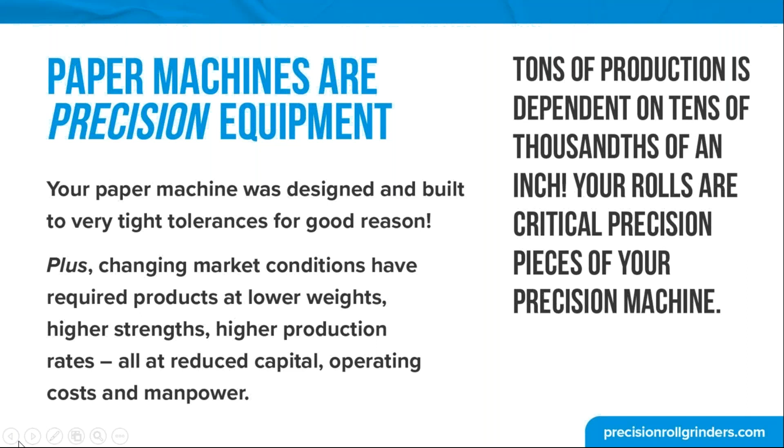So honestly, tons of production on your paper machine depends on tens of thousandths of an inch. So critical roll maintenance, critical roll servicing is a large part of the proper runnability and the proper maintenance of a paper machine.

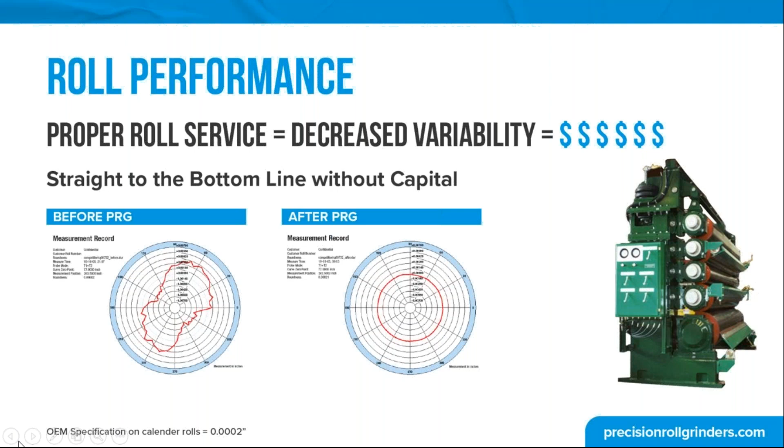Not only does it affect those parameters that we were talking about earlier with respect to your cross direction profile, your machine direction variability, all your quality parameters, but it also affects the length of time that that roll can run while maintaining the things that you need it to maintain on your paper machine. So getting as close to perfectly round as possible is critical. It drives decreased variability, which obviously drives the economics of your paper machine.

Every section of the paper machine has its own unique needs to maintain the kind of quality and the kind of production that you're looking for. In a forming section, it's improved machine direction and cross direction basis weight and moisture variability, primarily high frequency. That's very difficult to detect on the machine, even with the scanning platforms that are out there now, and particularly tough to detect in the paper testing lab. So improved weight and moisture control.

It's fewer issues that are carried down the paper machine into the press section, into the dryer section, through the calender section, onto the reel. If you have size presses or coaters on the machine as well, the more you can do on the forming section to reduce variability, the better off it is downstream.

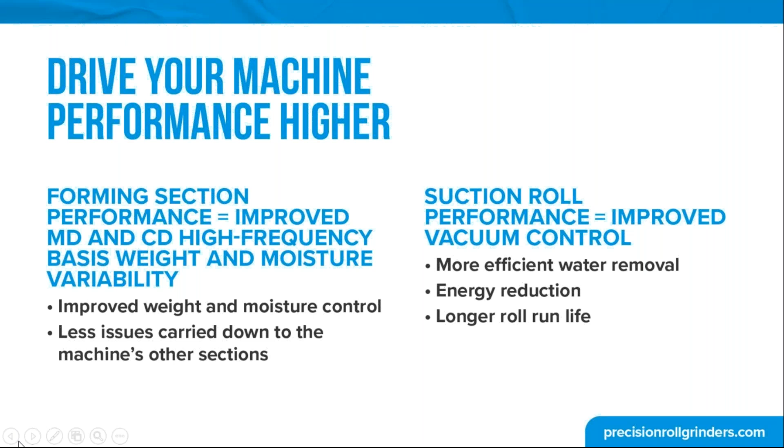Suction roll performance is terribly critical on a paper machine. Efficient water removal, the energy reduction, and those rolls are expensive to take in and out. So you want to run them as long as you possibly can. Couch vacuum, as an example, is critical to ensure that the sheet is strong enough to transfer into the press section properly and give you the kind of results that you need from the press section on.

Speaking of press sections, breaker stacks, size presses, on-machine coaters are all terribly critical with respect to roll shape, to roll roundness. The reduction and elimination of wet streaks is something that, in my experience, every paper machine goes through at one point in time. Energy reduction on those suction rolls, as we mentioned, and of course, longer run life on your rolls.

In addition, in coaters, it's consistent coat weight across the web. In size presses, it's consistent application of starch or whatever product you're putting through your size press. And then, of course, calender roll performance is really critical. We'll talk in a little bit about how the calender stack is the most important piece of the paper machine with respect to reducing variability.

But better reel building leads to better performance downstream, not only through your winder, but also with your customer. Improved strength variation. Quite often we don't think of the calender stack in relation to strength, but it is critical, as we'll show. Fewer sheet breaks at the calender and reel, and again, longer run life of those rolls.

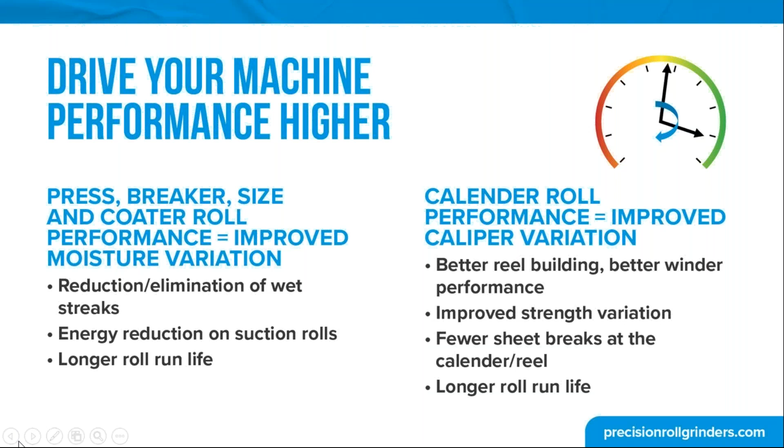Every time you've got to pull a roll out of a paper machine, it's a maintenance effort that you all know, and the more you can minimize that, the more you increase the safety around your outages, the more you free up resources to do other critical things on your paper machine. So we would ask you not to discount the longer run life of rolls as you start those rolls more closely to perfectly round when they go into your paper machine.

So again, the whole idea behind proper roll service and world-class roll service and grinding is to reduce variability and cost from wet end all the way down through your reel, and to drive profitability. Just to recap, in the forming section, it's cross-directional and machine directional basis weight variability.

Coming off the couch roll and into the press section, it's moisture variability, energy savings through proper suction roll maintenance, reduction in wet end breaks. There are many breaks that are hard to identify. How often is that coming from some kind of variability within a suction roll, or some kind of machine direction variability off of the roundness of a roll, or some kind of shape variability off the cross direction profile of a roll?

In a dryer section, obviously steam demand reduction is huge. You know, the 4-to-1 ratio that plays out between what you can get out in a press section versus what you have to do in a dryer section generates large economics on a paper machine.

And then as we get down to the calender, it's obviously caliper variation, which leads to strength variation, gloss and smoothness variation, and then, as we had mentioned earlier, much improved variability for the end user. And the end user starts with the winder in a paper machine, and then goes on, obviously, to your customers and how they're converting it, how they're printing it.

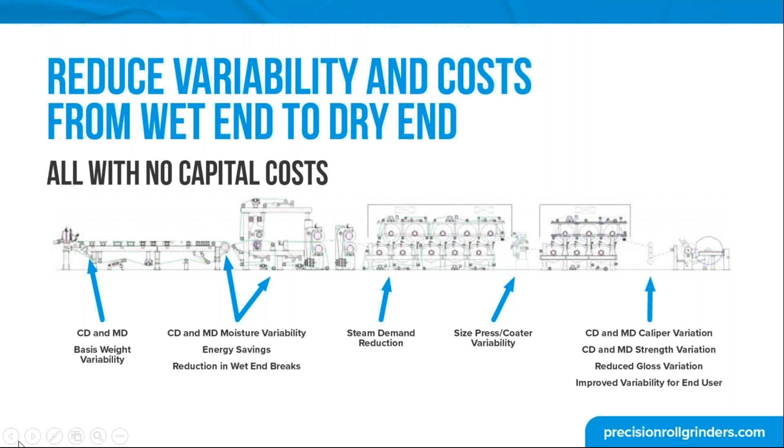So the forming section, it's a really important area that impacts formation. Obviously, cross direction and machine direction profile. It drives sheet strength because you're forming the sheet, obviously, in this spot. So the breast roll, the forming rolls, and gap formers are all very, very critical. And we watch those very closely with our partners in the paper industry to make sure that the shape and the roundness of those breast rolls and forming rolls is adding as much to your process as possible to reduce variability as you begin to form the sheet.

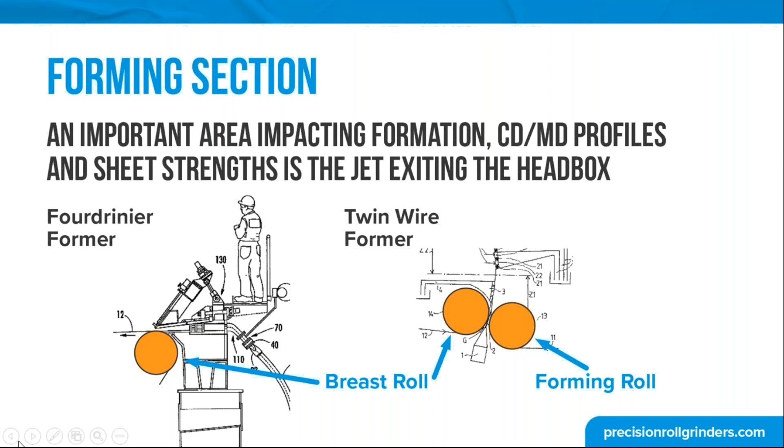Obviously, in the press section, press roll performance, improved moisture variation and solids entering the dryer section. It starts at the couch through suction pickup and transfer rolls, suction rolls in the press, blind drilled rolls in the press, making sure there's proper crowns that are in your roll shape properly, making sure that roundness is there.

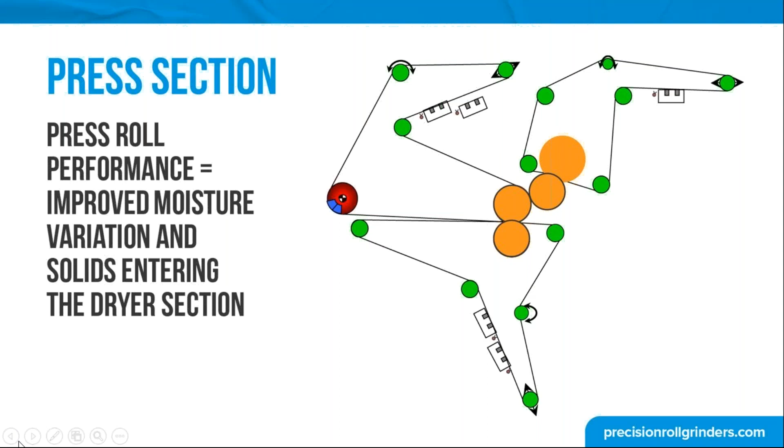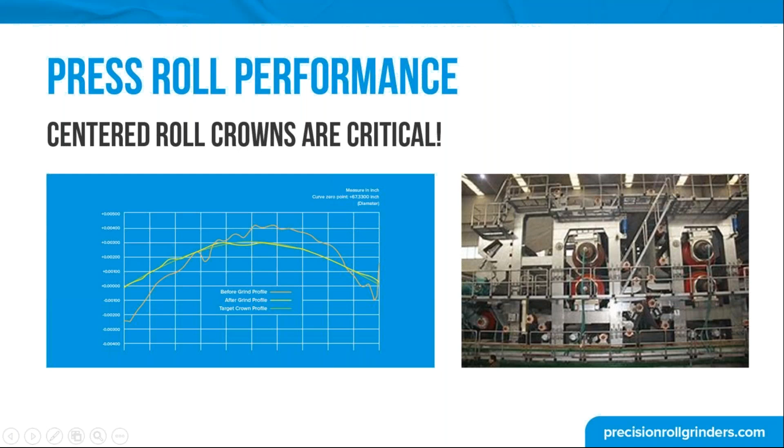And we've actually seen evidence of that in smart covers that are measuring the pressure. We've seen evidence of that a number of times in moisture variability all the way down the remainder of the machine. So even with press rolls, even with soft covered press rolls, it's critical that the grind is right. It's critical that the crown is right, that the roundness is right to get the maximum performance out of your press section.

This is generally how it manifests itself. You know, there's a moisture streak as represented on the left-hand side, and the entire machine is being controlled to that moisture streak.

As a matter of fact, in the paper industry, we're notorious for hanging other equipment on the machine from the press section down, actually starting in the forming section with steam boxes, but from there down with infrared dryers, with compensating controls on calender stacks that many times are trying to cover up what is caused by improper roll grinds down your machine that are causing moisture variation. So with a streak like that, in many cases, the machine is slowed down to control that streak.

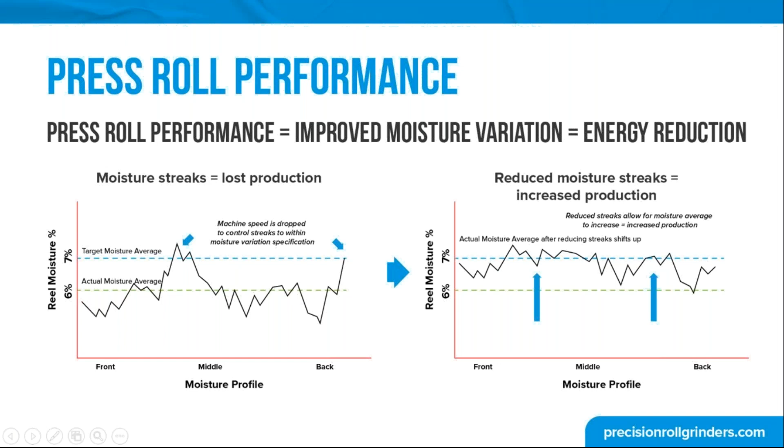With proper roll service, we've seen many examples where we're able to do what's on the right-hand side there and help maintain a much better moisture profile, and therefore, instead of having to run a lower overall moisture target, you're able to shift that target up, and in many cases, speed up the paper machine to shift that moisture target up, and thus driving economics.

And this is a real simple calculator that we've used with customers. It shows, and this is an actual case, where the average reel moisture prior to doing precision roll service and roll grinding work in a press section averaged about 6.2%. Production rate averaged about 50.5 tons per hour. By minimizing the variability of the moisture in the press section, they were able to increase the overall moisture, sell more water, but more importantly, speed the machine up to do that.

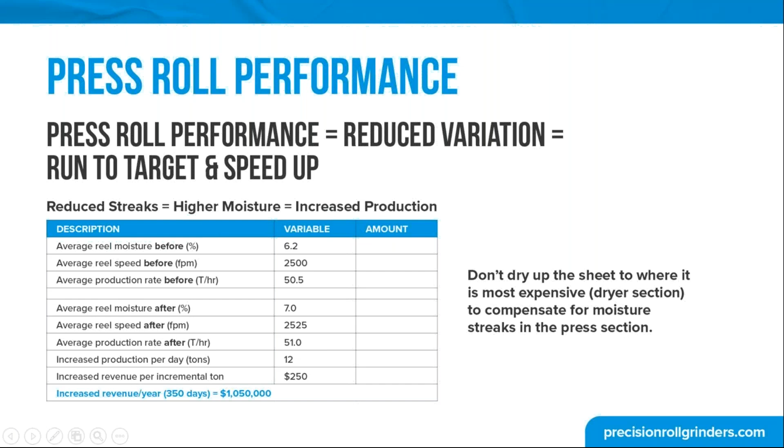So, you know, these are some relatively conservative numbers, and we've got a number of calculators like this for each roll position in a paper machine that we're happy to sit down with you and go through and leave with you so that you can plug your own numbers into them. But this was a savings of about $1 million a year for this customer due to the fact that they didn't have to compensate for a moisture streak.

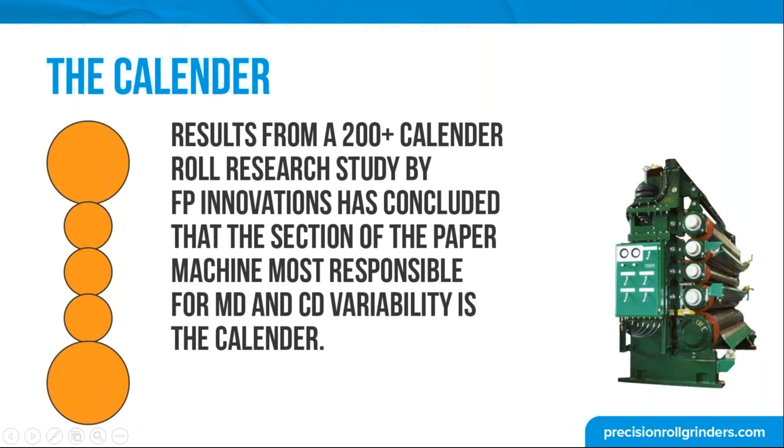And then we get down the machine to the calender, and backing up to that, that also plays out in size presses and coaters on paper machines. At the calender, there was a research study done a number of years ago by FP Innovations up in Canada, and this was an independent study that concluded that the section of the paper machine most responsible for machine direction and cross direction variability is the calender. We think quite often most of it happens prior to the calender, but the calender is that critical.

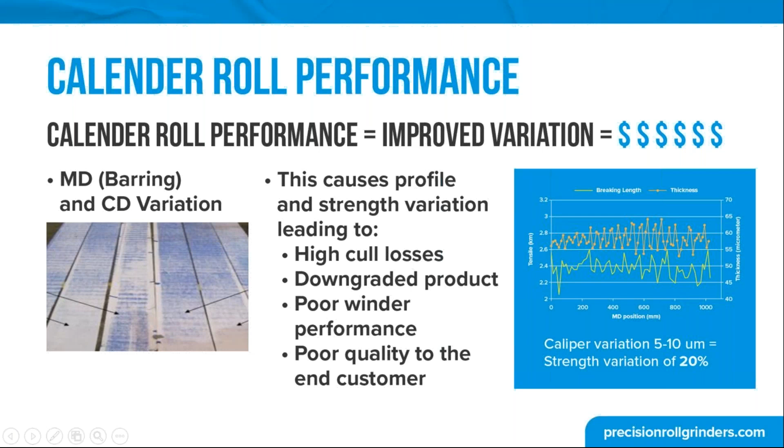We mentioned it a number of times throughout the webinar, but the added bonus is as you get closer to perfectly round, your rolls run longer. And 2.5 times longer has been proven out with a number of our partners in the paper industry. This is an example of calender roll work where the OEM specification for roundness on calender rolls is 2/10,000ths of an inch. Quite often they come back from grinders at 4 times that much or more, 8/10,000ths or 1/1,000th.

So again, we're willing to come in and sit down with you and show you the examples of this and work with you to really extend the run life of calender rolls. And this plays into effect on any roll in your paper machine. So again, it's lower maintenance costs because you're changing out calender rolls every 15 months as opposed to every 6 months.